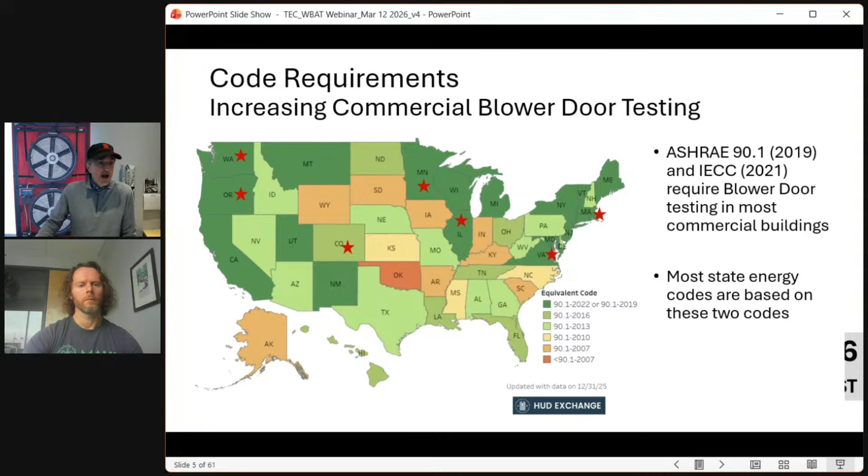Where you see the dark green and where we've added the red stars is where we're starting to see some activity. In some of these states, like Washington State and a few others, it's been going on for several years. But more and more states are being added, so it's code that's driving this increasing amount of testing.

So I show this slide just to start the discussion of what's different about commercial blower door testing. So what, isn't it the same? In many ways it's the same, but there are many, many things that are different. Just to remind us all, in a blower door test, what we're doing is trying to change the envelope pressure.

By 50 pascals. There's a natural pressure that's on it from stack and wind and mechanicals, and we want to change that by 50, and we want to measure how much flow that takes. That's a blower door test, right?

And then on a residential, there's some assumptions that are very easy to comply with. Do I have a single zone? Have I opened up all the bedroom doors and all of the doors in the house to make sure that I have a single zone? And it's some of those types of things that, as you get into bigger buildings, become harder to achieve.

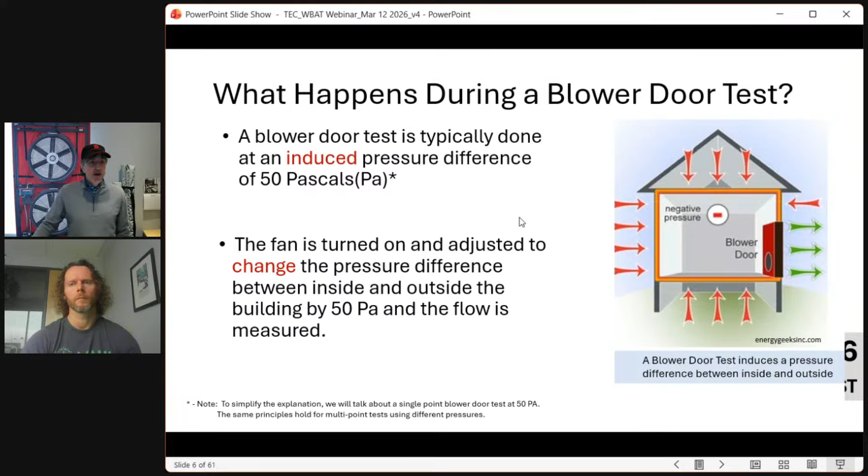And the challenges of making sure that's what you have. And then if you don't have it, how do you still get a valid test, testing the envelope for how airtight it is? So conceptually, it's no different, but the details and logistics are much harder.

So that single family residential test, whether you're doing weatherization testing or others, a lot of times things are tested, and the standard reference is E779, the ASTM standard. That's also used a lot for whole building testing historically.

More recently, there's been a new one added that is more specifically, the language in it is more specific to doing large or multi-zone buildings, and that's the ASTM E3158.

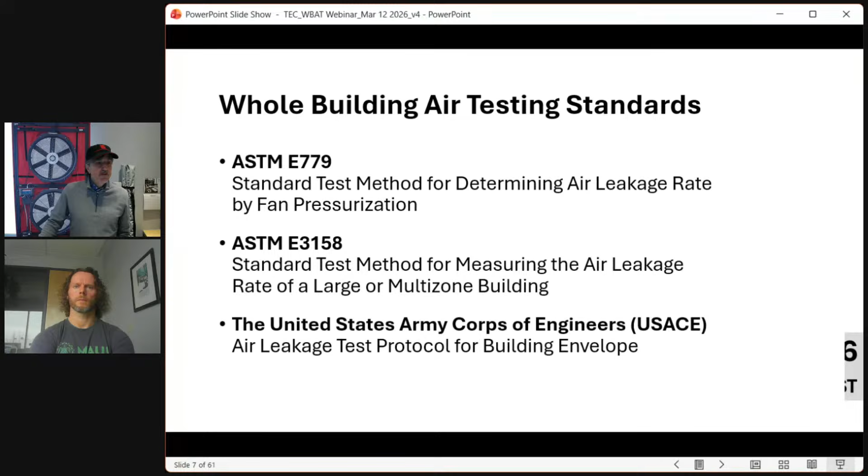And then a lot of people who were doing these tests historically were doing it because the United States Army Corps of Engineers was asking for it. They were testing their buildings, and so a lot of the testing prior to some of this code change was USACE testing. Okay, Jake, feel free to jump in if you think I'm missing anything. Otherwise, we're just going to keep plowing along here.

So I'm going to just take us through two more slides on 3158, and I'm not going to go through the details, but I just want you to see the kinds of details that are called out in the standard.

And so if you're being asked to do tests of whole buildings and you've never done much of that, you're a residential rater, or you're a residential home performance person that's seeing this as an opportunity, you'll probably be requested to do either E779 or E3158, or it might be your choice.

Meaning if it's not U.S. Army Corps, you're not doing stuff for the Army Corps, for the military, it would be one of these two standards. 3158 is more prescriptive.

It has a little bit more details to help you know, am I doing this right? And so they have things very specific about pressure uniformity, acceptable ranges, test durations, things that are more, and like E779, it's got acceptable ranges for N, but it's broader based on the kinds of Ns that you'll see in bigger buildings.

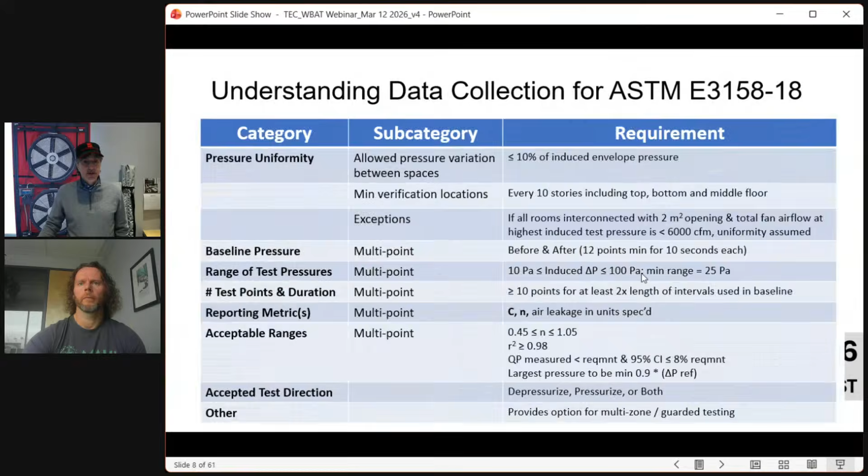So this standard helps define categories that are more specific to bigger buildings. And then the other big change here is, if we're doing an airtightness test, you're doing an envelope test. And that most of the time is what you should be doing if your job is to say, how airtight is this building, or how well constructed is the envelope.

But they also acknowledge that in some cases you can't do that test. And in some cases you may be asked to be doing an operational test for ASTM E3158. There's arguments about what's the value of that test, what can you conclude from it. But what this says is, I'm going to test the building in its operational state. So it at least gives people an option to say, what's the energy usage of this at a point in time when we tested?

But it acknowledges that as an option and talks about, if you are going to do that, how do you do that successfully? These show a lot of categories for how you prepare the building for a proper air tightness test of the envelope.

But if you're doing an operational test, the building's in use, you would set the building up differently. In many cases you're just leaving things as found, but there still are some things that you want to make sure you set up properly.

Jake, that's as far as I got in terms of setting up the opportunity. There are people who are a lot more knowledgeable about all of these than us, including the Air Barrier Association of America, ABAA, and many others. Most of the engineering firms that have been doing this for a long time are very well versed in these things, so I didn't want us to spend too much time on it.

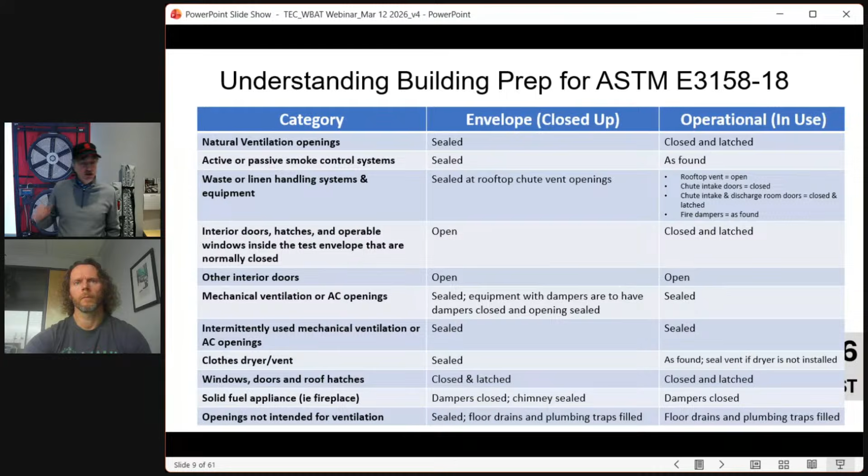Okay, if you're okay, I think we're going to keep moving and move into some of our capabilities. We're mostly going to talk about things we've been working on to try and make this testing easier with Minneapolis blower doors.

Okay, awesome, thanks. So this is just level setting here. The main thing is this concept of multi-fan testing. I think of it in units. You're using a single fan on a residential house in most cases. When you move up to bigger buildings, I start thinking of it in doorways and in 3-fan setups.

So when we set up our gauges and fans, because of how our gauges work, we can use 2 gauges to operate 3 fans. This is the gear you need to do that. On our first gauge, we set it up very similar to a single family test. Your channel A is typically getting an envelope pressure, B is going to get your fan pressure, which along with the ring, you convert to flow in the software.

When you add that second and third fans, you don't need another envelope pressure — we've already got one from the first gauge. Because of how our fans are built and how they work with back pressure and being independent of it, we can then, on a second fan, simply use that channel B. We've got an extra channel now on that second gauge, and we can get the fan pressure from the third fan with that.

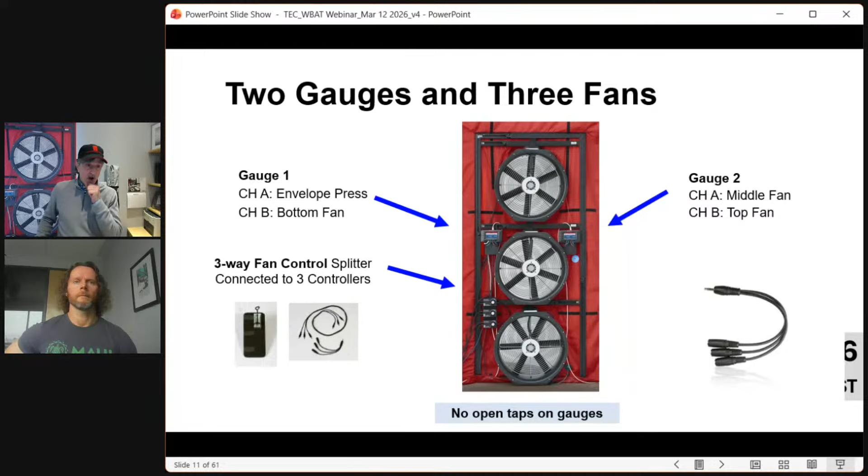So we've come up with a couple setup guides, again thinking of big building testing in units of 3 fans. This is part of some new guidance that we have out that just steps through thinking of those single units and stepping through the entire process.

So there's a lot going on with these documents. They're kind of meant to be a cheat sheet that you could possibly print out and keep with equipment, or just pull it up on your phone.

But it goes through, in point 1 there, installing the fans and whether they are set up to pressurize or depressurize, assuming you're inside the building. How would you set up the tubing? It's slightly different with how the fans are referenced if you're pressurizing or depressurizing the building. So that lays that out in the first step there.

The second one goes through the power setup, which I described earlier, the concept that 1 gauge is going to send a signal to all 3 fans for them to operate. And then the next part of it really is, once you're physically set up in the door and you've got power going to each fan, networking your gauges so you can pull all that data off the gauges while, A, to run the test, and then B, to pull the data back and compile your report.

So step 3 goes through a networking guide. There are a lot of different ways that you can tackle networking your gauges, so step 3 kind of steps through some of that.

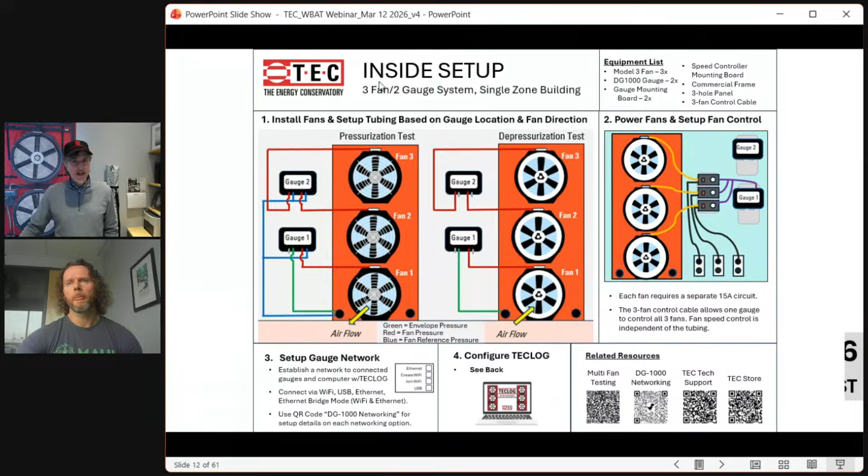And this one is saying if you're inside the building, which is the way most people test, right? But you also made one for what happens if you are outside the building. Slightly different, I mean very, very similar. The tubing's slightly different on the 2 setups, so this kind of keeps everything straight.

And so again, you'll see this later, but all of these reference guides for field use are up on our website, and I'll show you that as we get through the presentation and start talking about resources. Okay.

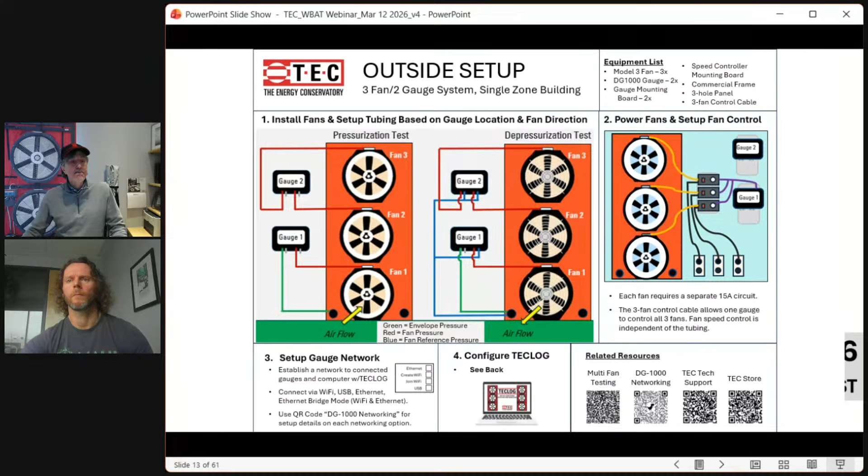Another concept is tubes versus cables. This is something we talk about whenever we're training somebody on how to use equipment. The idea here is that if you're taking data, you want to be sure that the pressure data you're getting during a building test is coming from the fans, or if it's coming from something you can't control like the wind, that you have a good idea you're isolating just that thing. So you need to understand some of the errors that can occur during a test that could mess that measurement up.

Most people who've done a test have seen someone open a door when the fans are on and a huge pressure drop because the envelope's been opened up. The opposite can happen when somebody steps on a tube - it compresses that small tube and can cause a huge pressure spike. Typically these are short-lived; they happen, then go away.

But there are some other errors that are more insidious, harder to see and understand. When you start getting tubes over 100 feet, you can start to run into the tube itself changing the pressure. So you're not measuring exactly the pressure you would with a very short tube - the inside of the tube is actually starting to change that pressure a little, which messes up your readings. If you have tubes with smaller diameters, that can increase that kind of error.

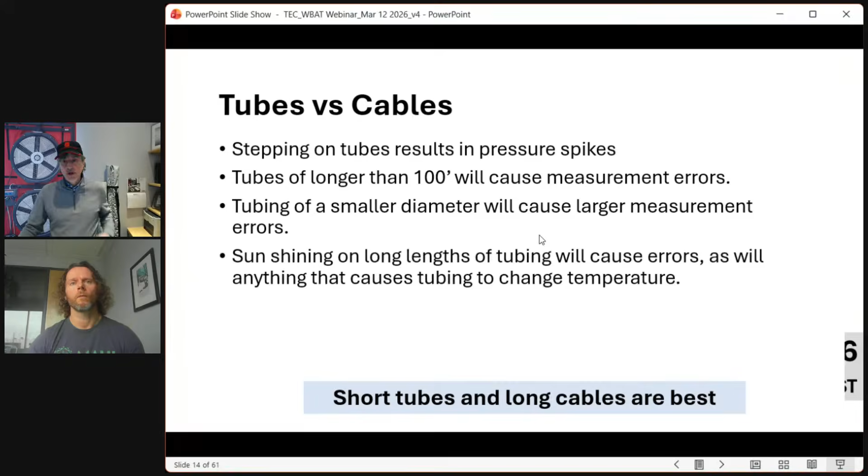Oops, I didn't know there was a build on that - sorry about that, Jake. But you had talked about this: if you run short tubes, you've got to run longer cables. That's a lead into this discussion around the DG1000 gauge and the options we have for communicating back. Ethernet cables are certainly one, but not the only way. The DG1000 has 4 or 5 different ways you can network it together, and understanding and using that variety can help make for simpler setups in some cases, and very robust setups when you need it.

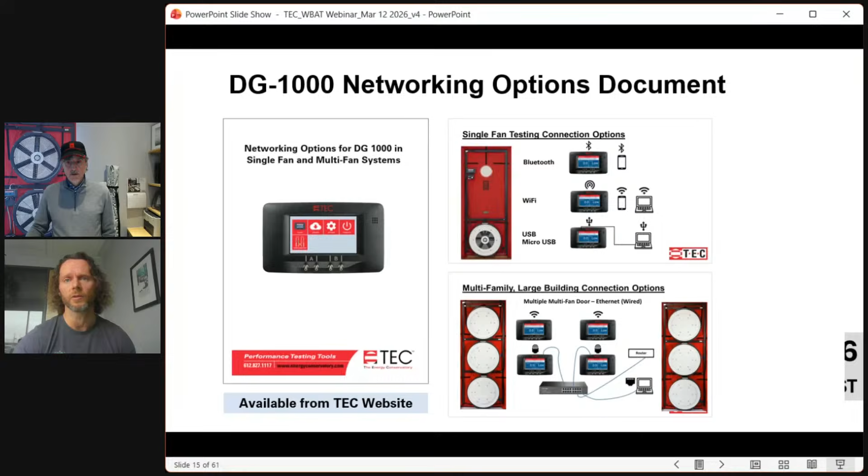I'm going to step through our guide quickly and talk about the different ways you can connect to the DG1000. The first one here is just using Wi-Fi. We've had this gauge out for 10 years now.

We worked really hard on this Wi-Fi, and it works really well. If you have line of sight, I used to say about 100 feet is good, but it's highly dependent on the environment you're in. Metal racking, rebar, concrete walls - there's a lot of things that can limit Wi-Fi signals, but in an open area, it's very reliable.

The DG1000 can generate a Wi-Fi signal similar to what a router can do. You can just take a laptop out and have one of the gauges generate a Wi-Fi signal, and all the other gauges within range can join. They'll see and join that network, and you can have the laptop join it too, giving you a fully wireless setup. If you want, you can grab a router and have it generate the Wi-Fi signal, and have every other device join that. So you have flexibility in whether the gauge takes the place of the router, reducing extra hardware that is another potential breakpoint in a system.

Or if you've got a great router, or a router with different ranges, you can certainly use that and have the gauges join it. So I always start with Wi-Fi - 100 feet and under is kind of my rule of thumb. Once I start spreading things further apart than that, I'll go to some of these other options.

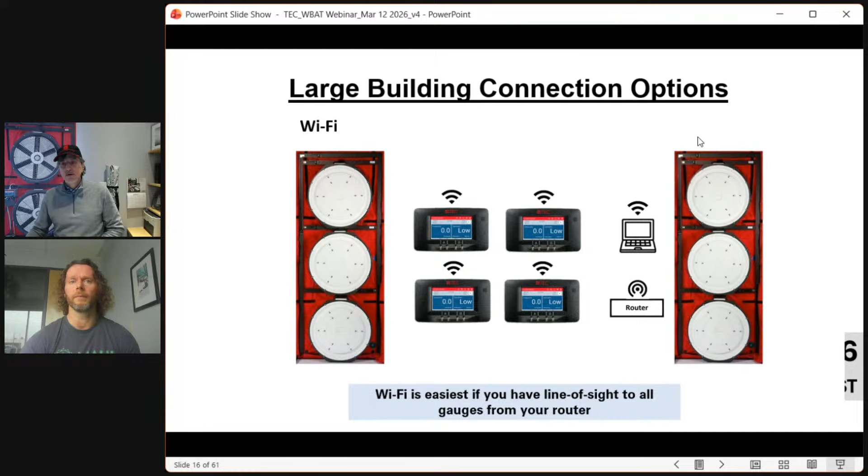Some folks will try to join an existing Wi-Fi network on a bigger building. I personally don't do that, and I haven't heard anybody jumping up and down saying it works great, because you give up a lot of control when you do that. You don't know what else is happening on that network, and having a dedicated network helps you have a bit more control. Okay, well, let's keep going.

The other end of the spectrum, right? Yeah, so for longer range, when you're getting outside of that 100-foot range, in my mind I go to Ethernet. The gauges also have Ethernet ports on them, and you can run Cat5 cable out from a router to the gauges, and then back to the laptop or computer.

This image here shows a switch in the center and a router. You would need a router that will assign the IP address to each one of the gauges. So you can use a router and a switch if you need more ports, or if your router has enough ports for your gauges, you can get rid of the switch and just have a router there.

Ethernet is great for long distances. It's very reliable, it's a physical thing, you have complete control of it. The main thing with Ethernet cable is being fastidious about checking it before each test, because it can be damaged - cabling and tubing can get holes in it, and cabling can have broken connections. So as you build up an arsenal of Ethernet wire doing building tests, make sure you check it regularly - I think that's important. But this is a very robust, tried and true method for large buildings where you need to span long distances.

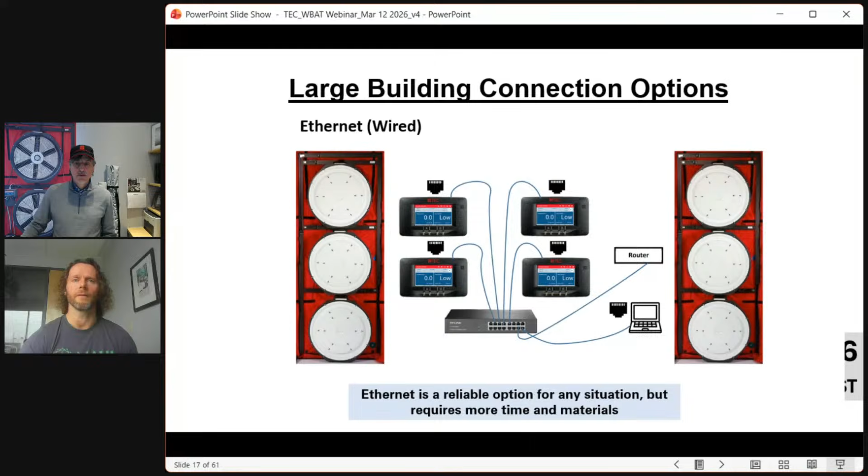Okay, and now in between, right? Yeah, the in-between is say we've got a few doors with 3 fans in them, and they're on opposite ends of a big building. Based on my previous picture, you'd be running a lot of Ethernet cable back, or adding switches and a bunch of little strands out at each end of these two separate satellite installations of fans.

So another option is you can use a bridge mode, where you can have a gauge that is connected in the wired Ethernet way, and it can then also generate a Wi-Fi signal for the gauges around it.

So again, say there's 6 fans far away from you. You could run one Ethernet cable out to one gauge, have it broadcast Wi-Fi, and then have the remaining gauges within line of sight of 100 feet. So you have this huge bubble around that one gauge where you can connect more gauges, and they'll send all their dedicated information down that one Ethernet cable back to the computer. It's a handy way to do a hub and spoke setup, sending long runs out and then using Wi-Fi to quickly grab more gauges in the area.

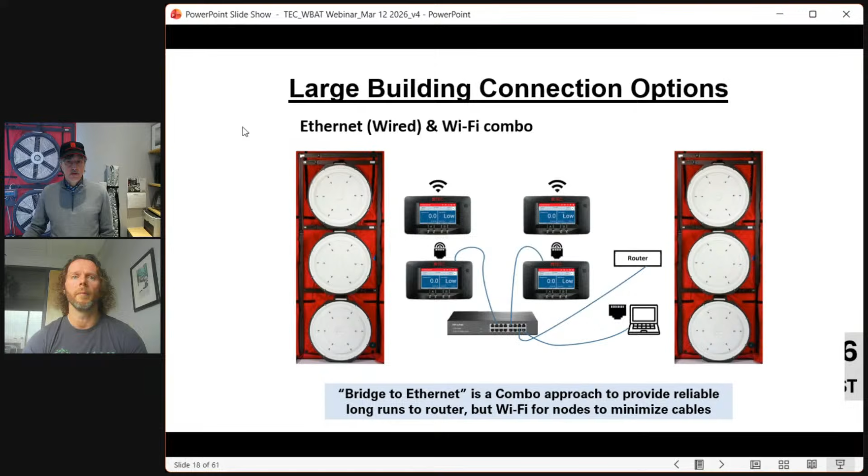And then going corner to corner, I've also tested the building in that direction as well, and that's much longer. I think I actually haven't tried Wi-Fi there. I think I need to do that actually.

Well, maybe next time. I'll run Ethernet down the middle of the building, and then at one of the corners where I'll have multiple fans, I'll use that method we just talked about. I'll run one cable and then Wi-Fi to connect all the gauges out at that branch. So it's just an example.

Our building's not super easy to test. It's not the biggest building in the world, but it's kind of a hostile Wi-Fi environment. There's a lot of metal racking. It's not just an open warehouse.

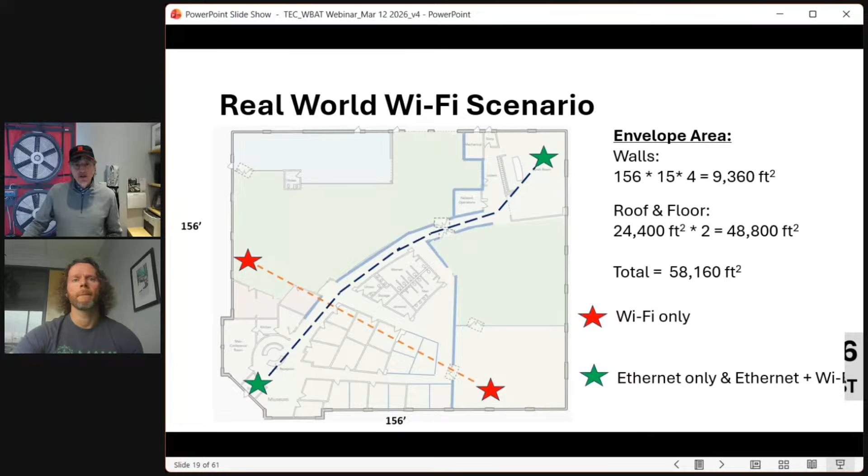Jake, we talked about why you would want to use Wi-Fi, either if it's close enough or in this situation where you're doing a single Ethernet and then Wi-Fi. And to help with that, this is one of the things we've just come out with recently—this is a free update to your DG1000s if you've got them.

You've got to make sure you bring your DG1000 into a Wi-Fi network and connect it, and then it will have an update available. In that free update, you get this capability, which is of interest if you're doing more of this multi-fan testing.

The idea is that when you start the network broadcast by a gauge, all the gauges that join it—it's just like any other Wi-Fi network. You'll have to identify the network and then enter the password to get onto it.

We've now just changed that so that when a DG1000 sees a network coming from another gauge, another DG1000, it just skips that. As soon as it sees it and you select it, it will join it without the password. It's a little quality of life feature, but if you're trying to connect 16 gauges, you can spend a lot of time punching in passwords. Now they'll just automatically connect.

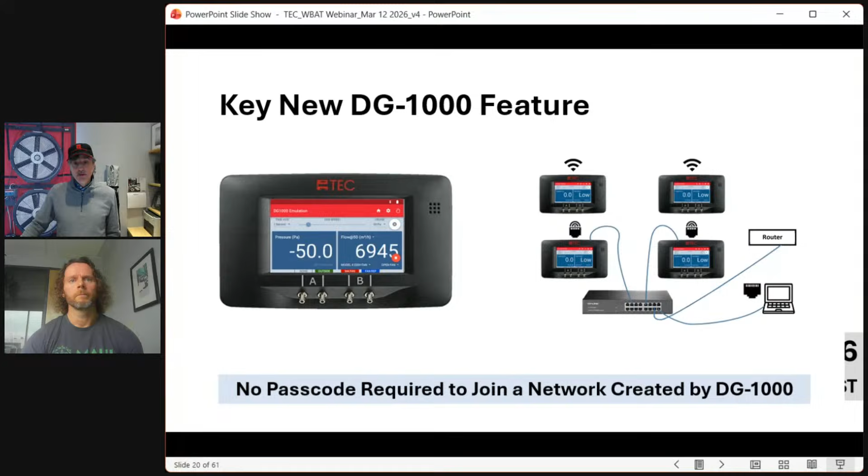Yeah, the DG1000 says, well, if I'm trying to connect to another DG1000 network, no password needed, let's move. And that was suggested by one of our users, and it's something that is implemented now.

Similarly, Jake, I know we've made some updates to Teclog that are similar sort of efficiency improvement type things. Can you just take us through Teclog?

Let me introduce one thing though that we didn't get into the slides. Some of you watching this may have only used single fan tests, and maybe you've heard of Teclog from us, but you're using either an old software program like TECTITE, or our newer app Autotest, to capture all your data and build reports, if you are making reports.

Once you get past one fan, though, you have to move to Teclog. This is a Windows-based program that you have to have a PC for. So that's the multi-fan software for big building testing for us.

So Jake, take us through some of the updates that have been done. Oh, by the way, just like our apps, it's free of charge—you can download it directly from our website. I'll show you that at the end of this presentation.

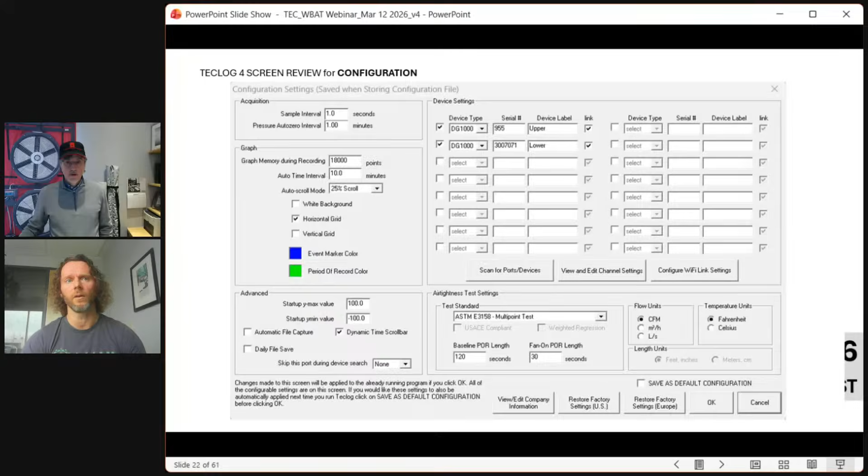So we come to this screen right away, and the first thing you do is hit the scan for ports and devices, right in the middle there. When you scan for ports and devices, it will go and look for every DG1000 that it can see, it being the computer that's running Teclog.

So you have a router connected to that laptop through Ethernet or Wi-Fi, and that router has cables going to the other end of a building with many gauges out there, it will see those. If you also have a Wi-Fi network running with gauges on Wi-Fi, whether bridged or not, or something plugged in with USB, it will scan for all devices that it can see.

So you'll get a screen like this, which will show all the TEC gauges that it can see.

In the past, it would just grab them all, and there they were. We've now done this simple thing where when you make the scan, all the serial numbers of the gauges are ordered, so if you've got a fleet of gauges you're using over and over again, they'll scan and come up in a repeatable way, making it easier to identify them and set the specific channel settings for each gauge.

So when you get done with that, you go through the device settings section above, where you name each gauge. Some people still have DG 700s - you can have 700s and 1000s on the same network. So you go through and say, what type of gauge is this? And then you identify where it is.

Once you're done with that, you open up each gauge itself and specify channel A is doing X, channel B is doing Y, giving them specific names, which really helps later when you're running a test with many fans - having good labeling so you know what each channel of each gauge is measuring can really smooth your test out.

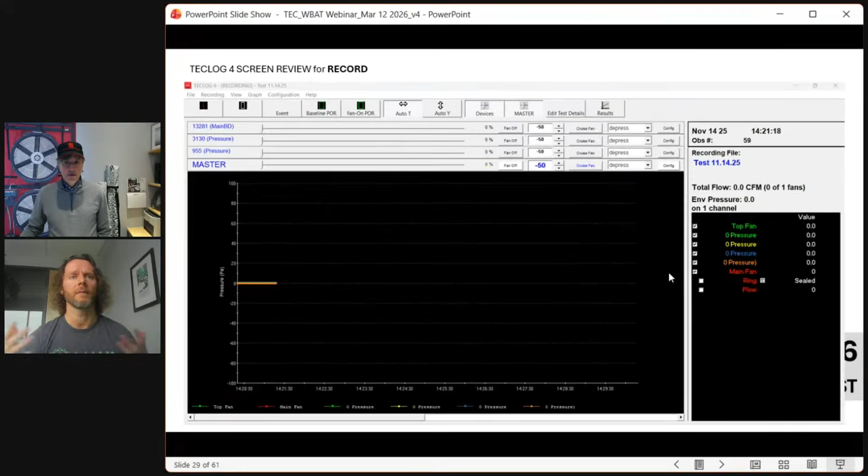So just a little indicator of how to make sure that your tubing is set up so you get good answers. Okay, very good.

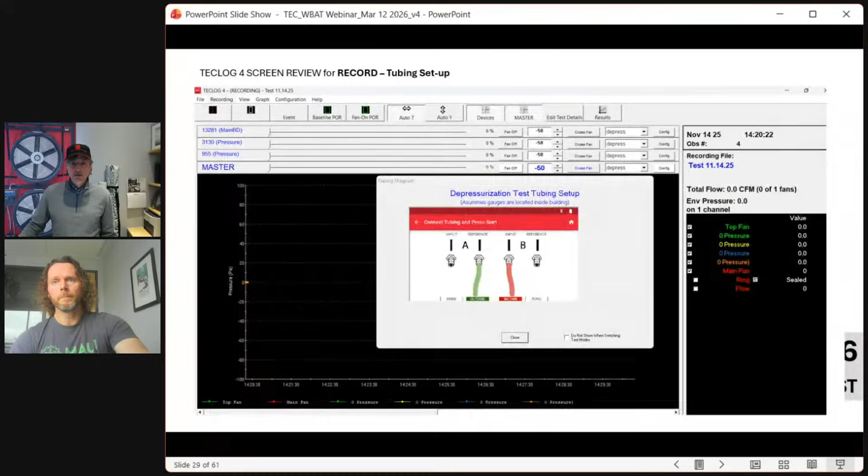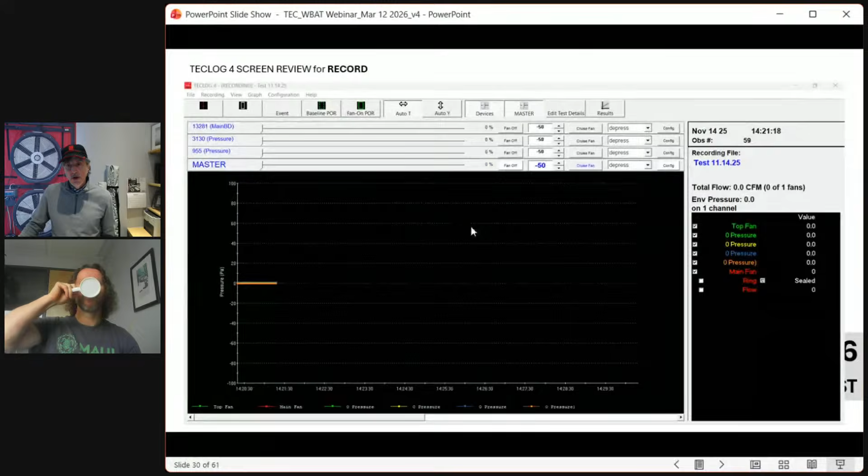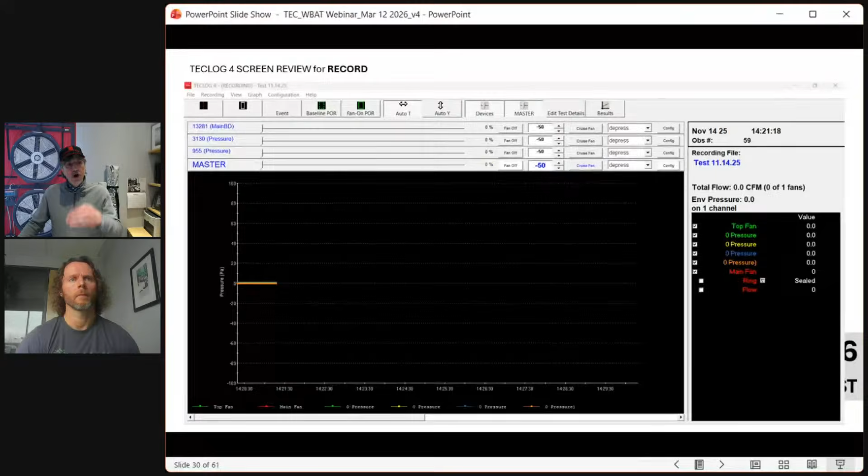I'll show you another resource on our website - a couple of videos about how to set up Teclog. It was originally developed for research logging data and then quickly applied to big building testing. Its user interface isn't wizard oriented, so you have to go through a learning curve, but then it's very powerful. It gives you a lot of visual clues of what's going on, but there's a learning curve. So we have 2 videos that take you through all the tips and tricks of setting up Teclog and getting familiar with its shortcut keys and things like that.

Okay Jake, I think we're almost through this section, but there's one more thing we wanted to talk about. Yeah, one of the big things with doing a big building test is how many fans do I need - the process of planning for that.

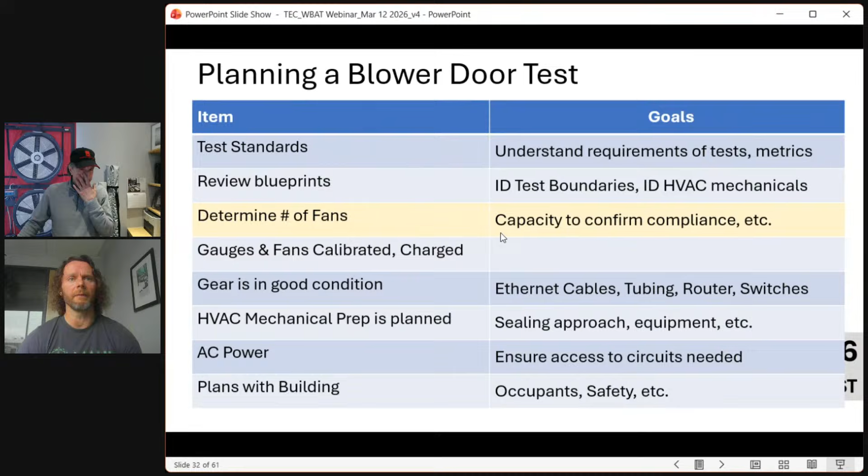A big part of it at the end of the day comes down to how big is this building, and what standard or target they're going to hit as far as tightness. We don't know what the tightness is - that's what we're there for. But let's plan for the maximum amount of CFM that building will need to hit that failure mark.

So everything is past spec - you don't really plan for that. You can bring extra fans certainly, but on big buildings, as long as you can cover enough flow so you're 1 CFM over what they need to pass, or a bit more, that's kind of where a lot of people will land.

So we use a calculator tool where you'll plug in the relevant inputs. Your test pressure is relevant - fans at higher test pressures flow less than they do at lower pressures. So you need to know the test pressure and the specification for the target. It's usually CFM 75 - in bigger buildings that's usually what they're tested at. CFM 50 in residential, CFM 75 for bigger buildings.

And so we use this calculator to back out the amount of flow we would need to pressurize that building at that certain leakage. So you use this calculator to do that, and we'll kick out an answer.

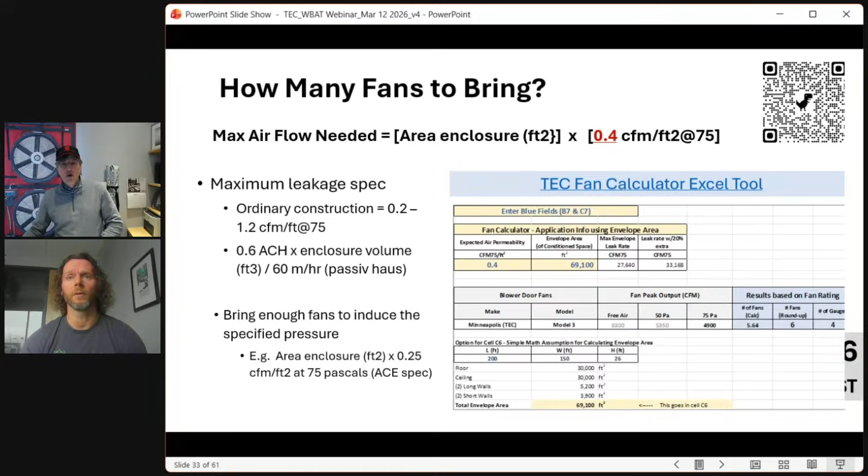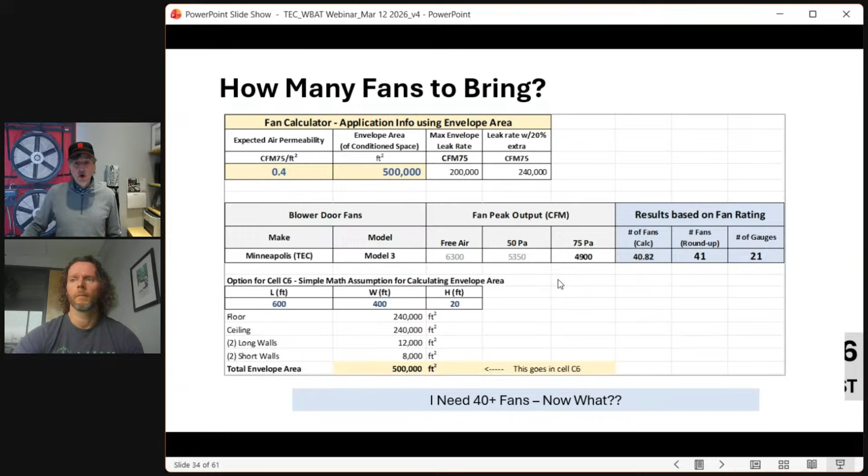One of the things we've run into recently is people are testing bigger and bigger buildings. In some cases the answer doesn't come out as 'oh, you need 6 or 8' - it comes out 'you need 27 or 40.' So we've been challenged: what do I do in those situations, what are my options? Jake, you want to take us through a little of that with what we've done in Teclog?

Yeah, so Teclog already supports 16 gauges with one iteration. This is part of the flexibility of it - you can run 2 versions of Teclog on the same computer at the same time, and basically double that. So you could run 32 gauges off 2 iterations of Teclog.

So this is just a visual of, hey, I need 40 fans - that's a lot, that's a really big building or a very leaky building. So on the left there, Teclog iteration 1, I open it up like normal and I've got 16 gauges, 32 channels. Let's say I want a building pressure on each side of this building, cardinal directions, and I need a minimum of 1 interior pressure. That leaves me 27 fans - that's a lot, hopefully most jobs you'll ever do.

But if you run into something really, really large, you can then launch another version of Teclog. The networking you did to get all the gauges set up still applies, and you can then take, in this case, 7 more gauges for 14 channels and get your additional 13 fans with 1 to spare and run the test.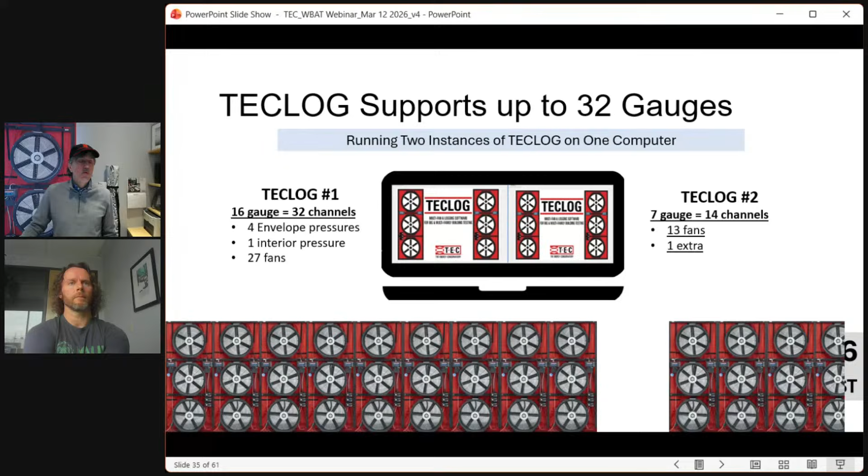Okay, back to you, Jake. Yeah, so just to step through it really quick, you would network your gauges as normal. So all of those gauges, regardless of which version of Teclog is recording their data, get networked the same. So everything we talked about before applies. Configuring the gauges, the first 16, that's just like what we've talked about as well. It's your standard setup.

And then once you have your first 16 set up, so you've basically maxed out what Teclog can do, you launch that second version of it, and then side by side, or one in the background and one in front, you scan for ports and devices on your second iteration of Teclog. It will scan your whole network again. Anything that's already been identified and used in your first version of Teclog is excluded. So it will just see set up gauges, dedicated, the ones that are not already in communication. Right, so you then just go through and take those remaining gauges and do the setup exactly as you would for that.

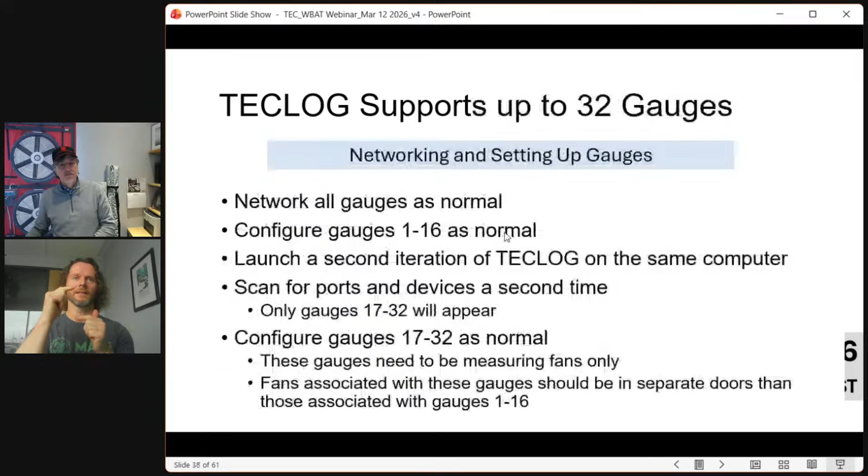So notes, this is the kind of thing. Oh sorry, Jake, I was just saying two notes is just that I wouldn't... I'd make sure that... I'd think in units of 3. I obviously don't want 2 fans on the same door going to different versions, but so that's my only point there.

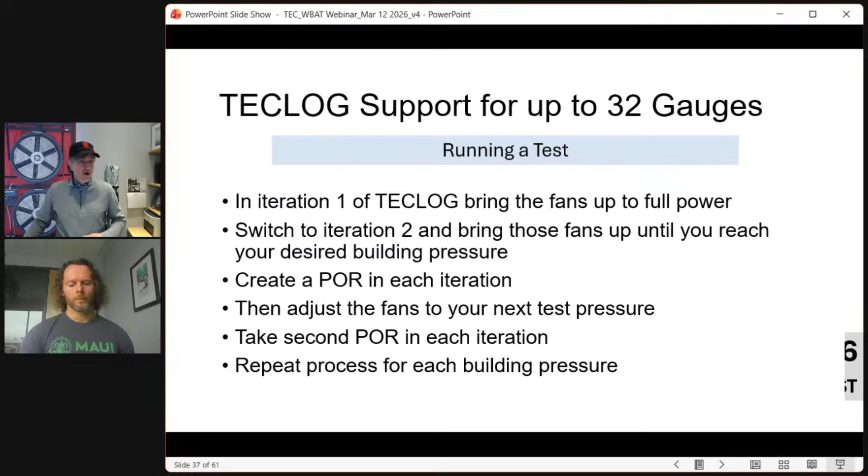Yeah, okay, and this is the kind of thing that we would go through. We've done some specific work, and if you are in a situation where you need this, call us, we will take you through it. We're developing a guide for this. We do this in our training, and as we do our next round of training that I'm going to tell you about, this will become available. But if you're running into a situation where you're doing a really big building, please reach out to us and we'll help you plan that and make sure that you're ready for that kind of test.

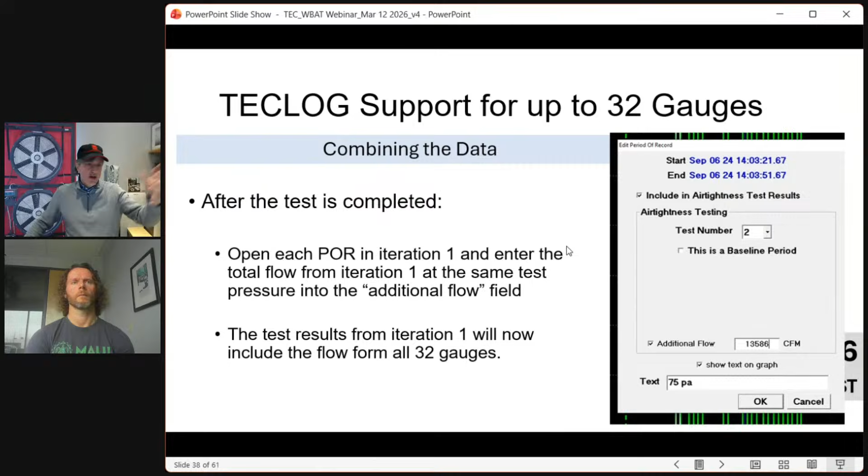You know, the other thing that comes up on this, so okay, Teclog now supports this, I've got all this, what happens is in a lot of cases you just don't have enough fans in your possession. And so another thing that we've added is a rental program that's more formal for commercial building testing. And so we get a lot of questions where people say, hey, I need another 3 fans for this test, I've got 6 in my company, but we need 9 for this test.

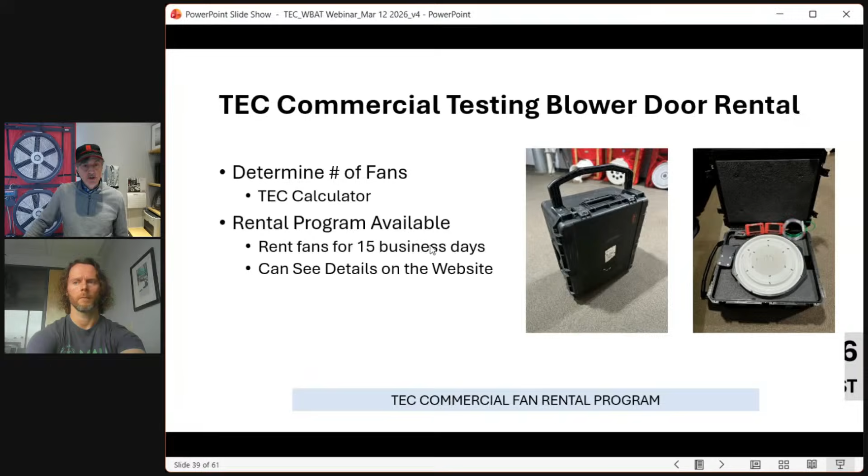And we now have a program that is available. The details are out on our website now, and you can see how does that program work. I'm just going to take you through it really quick. You essentially can rent a fan for a 15-day period. That's 15 business days, with the intent that it would be on site for you for 10 days, 2 weeks essentially. And then the other week is for logistics of shipping on both sides. And so it's 15 days from our dock back to our dock.

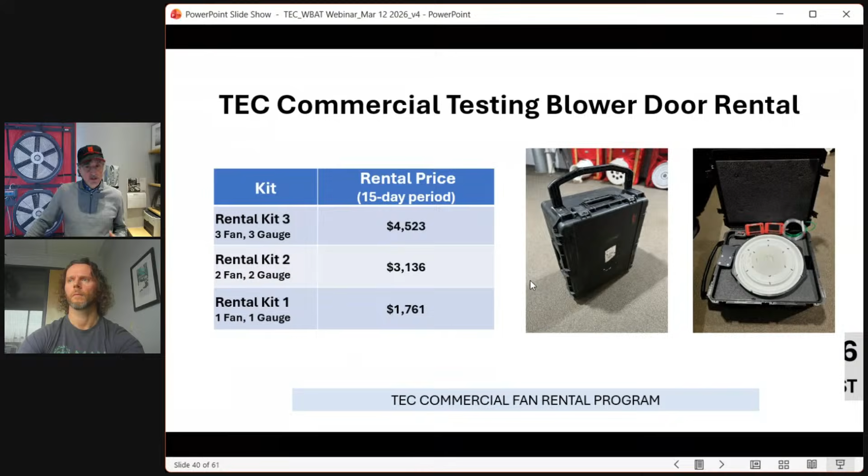And you can order a kit 3, which has 3 fans and 3 gauges, a kit 2, which is 2 fans and 2 gauges, and a kit 1. And we do that just to keep the logistics simpler for us, so that we can stock these and have them available.

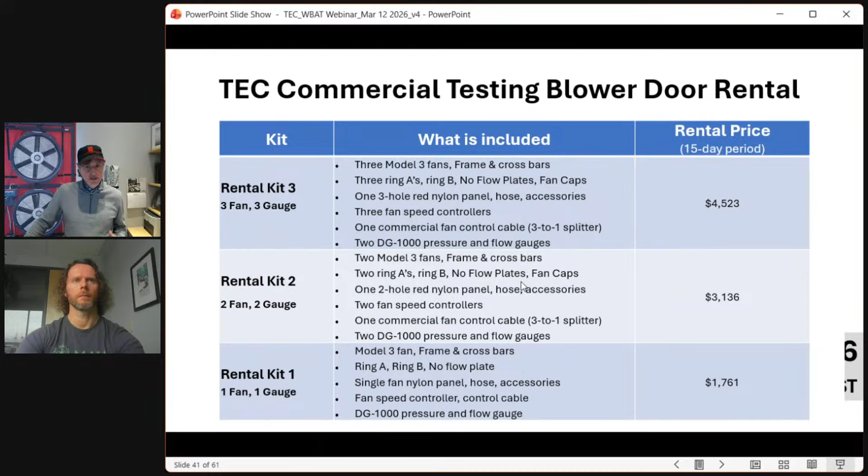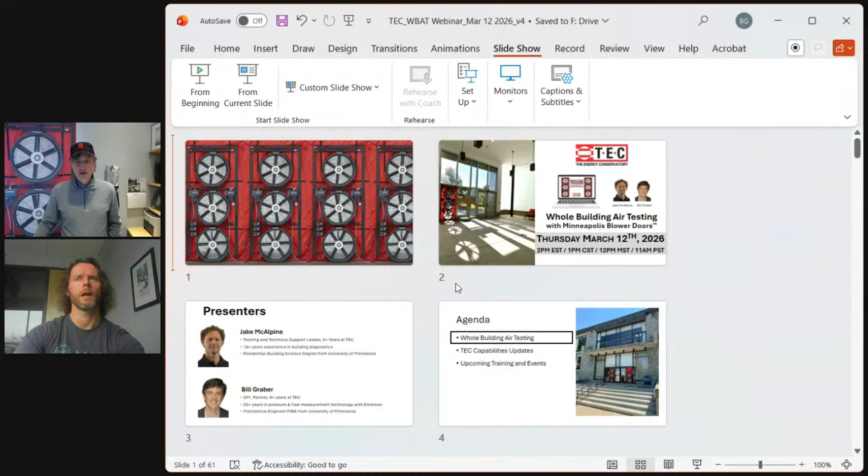Did I lose you guys? Nope, we're in there. Okay, I no longer have control. So something locked up. Okay, so the other part of this program is there's a process out on our website. I'm going to stop sharing for a second and see if I can... Can you still hear me, Jake? Yep. Okay, something just locked up. So let me come back. I can see everything's moving now for me. I can see her. Yep.

Reservations happen and other people need those fans. So you have a reservation date, but if you need to move it 15 business days before, you can move it without any penalty. But once you get inside that schedule, that's your drive to stay connected with us and communicate if the test date is moving, which on projects often continues to shift.

If you move it more than 15 days prior, we won't charge you anything for a change in reservation. You don't put any money down. You only pay for the rental when it is shipping. So in order for us to ship, you pay and then it goes out.

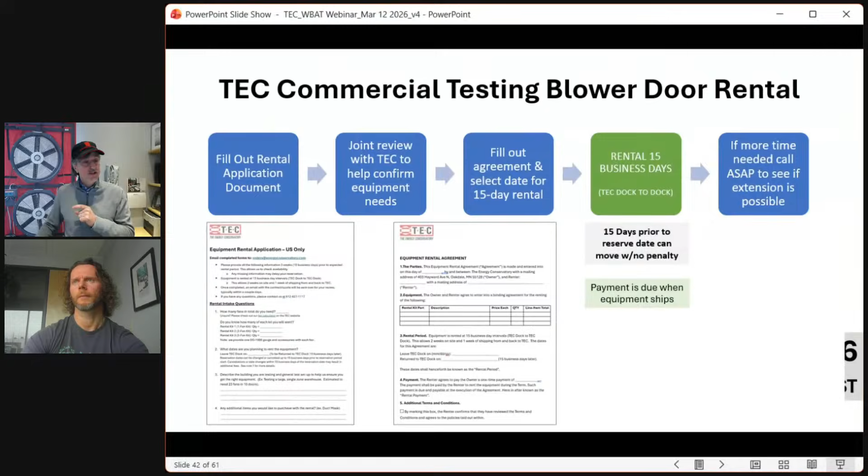There's a lot more detail on our website for that, but this is really helpful for people who aren't ready to make a big investment in more fans yet, because they're still trying to figure out if they want to do commercial testing. It helps them meet the peak capacity they need for a given test and grow into it.

The last thing I want to talk about in terms of new stuff for commercial is we now have 10-foot commercial frames and panels available. We've had several requests for this over the years. I've got two versions here in the case: this one is our standard 8-foot, and this one is the 10-foot.

Why did I bother to show you? Because when they break down, this one's a foot taller still, and you can only break it down so far. You don't want to buy this big one—not only is it really expensive because we don't get much demand for them yet, so this is really low volume production for us—but we want people to be aware of it.

If you need it—if people start saying they're seeing a lot of 10-foot doors and need a bigger frame—then the price will probably come down as we move more volume to it, but it is available. We have a limited quantity in stock right now, and the lead times will be a bit longer. But if you're not really sure you need that, you probably don't want it. That's our message, because it doesn't store as well—our frame is already sort of long and clunky, and this makes it worse.

This comparison shows an 8-foot residential panel, which is 45 by 96, an 8-foot commercial one, which is a little wider but also 8 feet tall, and the new one, which is 48 by 120. You can use this on an 8-foot door. The panel is obviously bigger, and we've added some Velcro so you can roll it up at the top—so it does work that way.

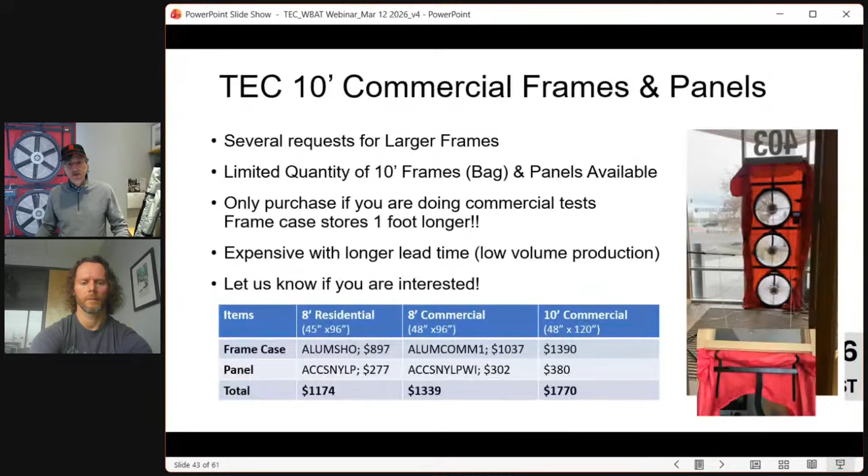This is available, it's not on our website store, but if you're interested, you can give us a call and we can take you through it.

Last 5 minutes here, I'm going to take you through upcoming events, and then we'll open up for any questions that have come in and try to answer those.

The big announcement we're excited about is the Air Barrier Association of America national conference, coincidentally, is in Minneapolis this year on May 5th and 6th.

Right after that, we're holding a whole building air tightness testing, just TEC, at our new training center. The conference is Tuesday and Wednesday, and the Monday before, we're having a pre-conference party. If you come in for the conference a little early, we'll have buses taking you from the conference hotel in Minneapolis over to our facility, with food and beverages, both alcoholic and non, flowing freely—it should be a really fun time.

You can come see our new space—this is our new building. It's on the east side of the Twin Cities, and we really encourage you to stay connected with us through our newsletter, which will keep you updated on what we're doing. This has been a big investment for us, as we try to make this a place where we advance building diagnostics.

That's our role in the world, and this is intended to help advance that. But we're not trying to become a training organization alone. We have a lot of great customers and partners who do training. We're trying to make this more of a community where we train trainers and talk about the biggest challenges you're seeing, and how we can make it easier to do good work.

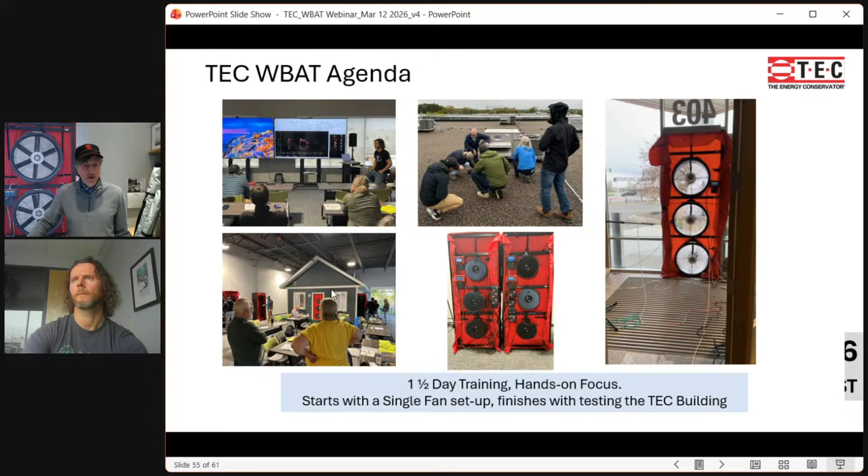And then on the last day, Friday morning, you test the building. So you're getting the experience of actually testing our building after you spend a day going through how we do this. That's the goal.

The other thing we have is Nate—believe it or not, Nate takes a whole bunch of photos of all the blower door tests he runs. We have a nice hall, the blower door hall, down in our building where we display those. We run a contest—if you've got blower doors and take photos of them, we run a contest every year and these rotate. There's also a calendar that comes out showing the 12 photos hung in our hall.

Okay, so that's all going on. This is our suggestion: come to the ABAA conference in Minneapolis the first week of May. Come in early and join the party.

I hope this works—I'm not sure. Actually, I'm not going to do it. But it should be a fun time, and you will have a food truck, or maybe a couple food trucks.